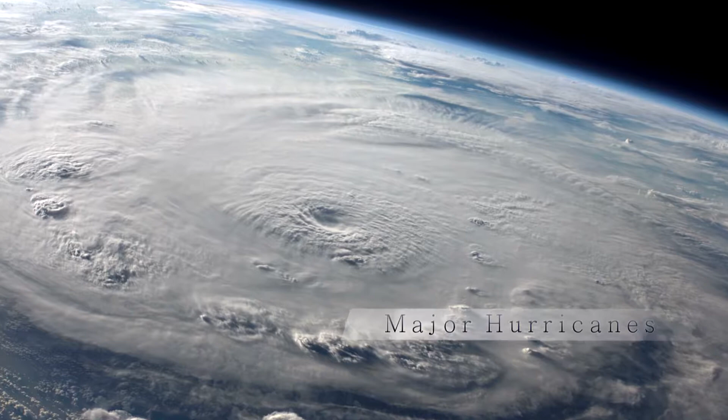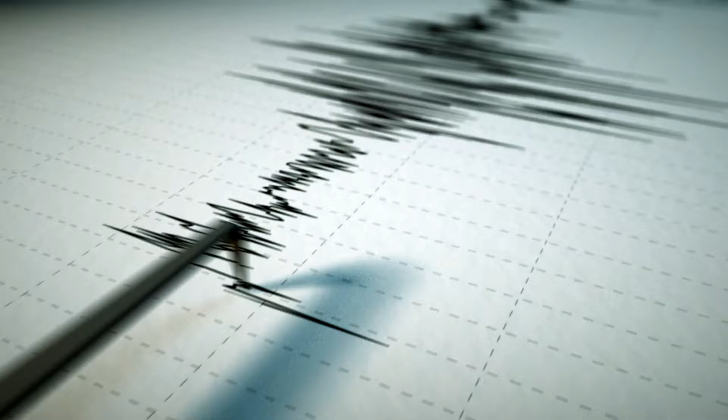Major hurricanes from climate change. Sudden rainstorms caused by global warming. Earthquakes that result in tsunamis. Damage from flooding caused by natural disasters is a real threat in our world today.

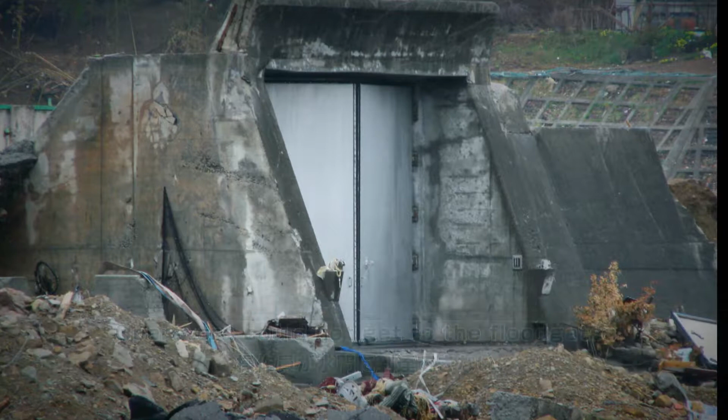The Great East Japan Earthquake of 2011, a magnitude 9 earthquake, triggered a tsunami that caused tremendous damage. The earthquake damaged roads, making it impossible for some floodgates to be closed. Many volunteer firefighters became victims of the disaster while closing the floodgates. We must not let future natural disasters result in such a tragedy.

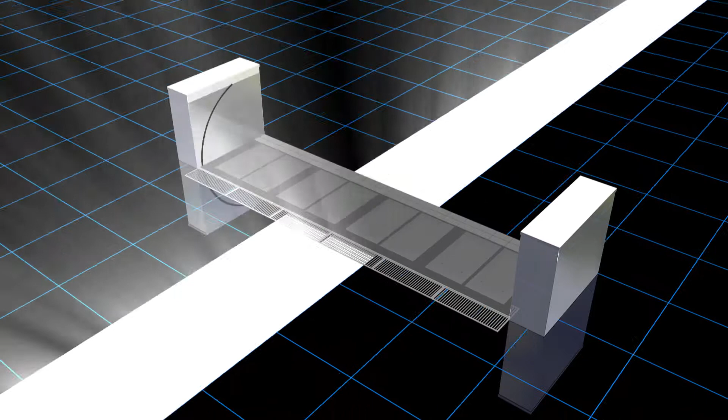Now, one possible solution is offered by the automated seawall system, NeoRise. The NeoRise stainless steel gates are reinforced with hard resin, adding strength while keeping the structure light. The flap gates float when flooding occurs, and counterweights automatically raise the gates to the water level.

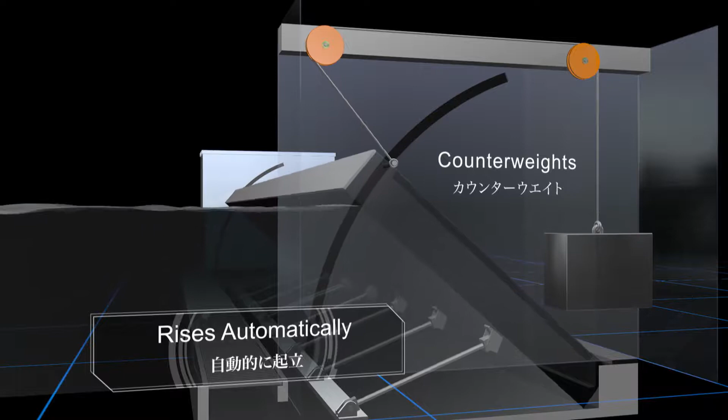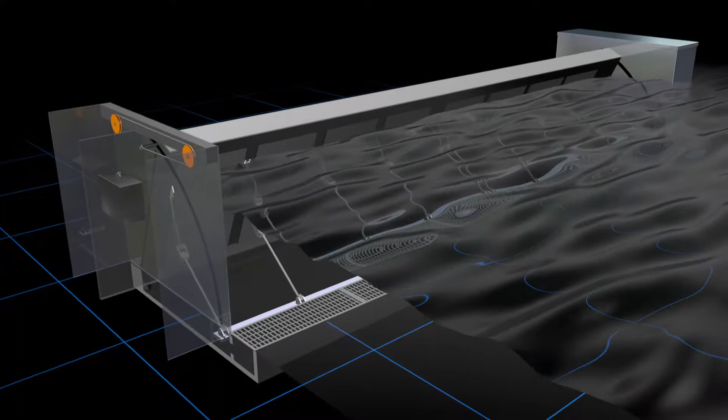The NeoRise system utilizes buoyancy and water pressure to close the gate. Therefore, electrical and communication systems are not needed, and no human interaction is required. No human intervention. No risk to operators' lives. No burden on human resources such as volunteer firefighters and civil engineers for surveillance.

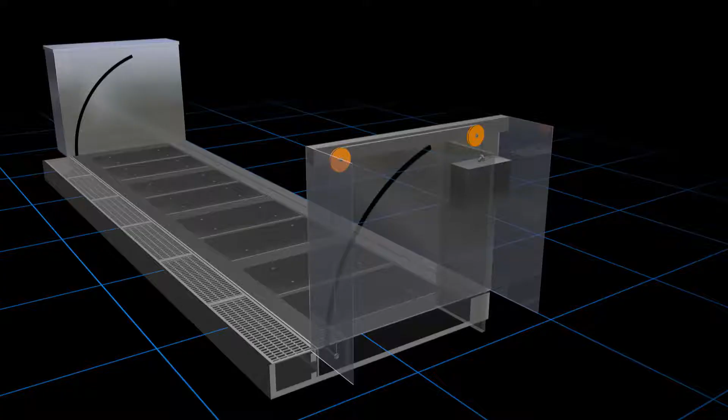When the NeoRise flapgate is in the resting position, the force of the counterweight raises the wall to absorb and dissipate the impact of the storm surge. There are no sudden movements that could cause injury.

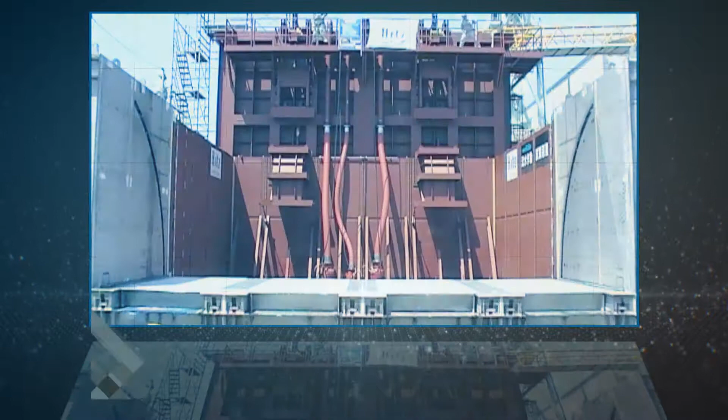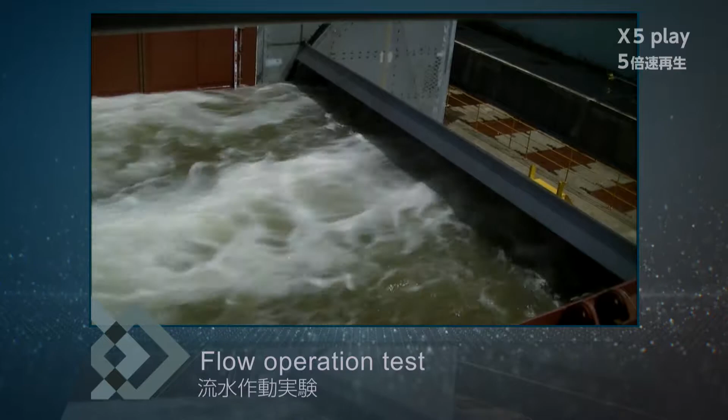Flow operation tests have been conducted at our own factories. Gates must adjust smoothly to floodwater levels and also must close quickly, but not so quickly as to be a danger. The flapgate opens and closes without endangering anyone nearby.

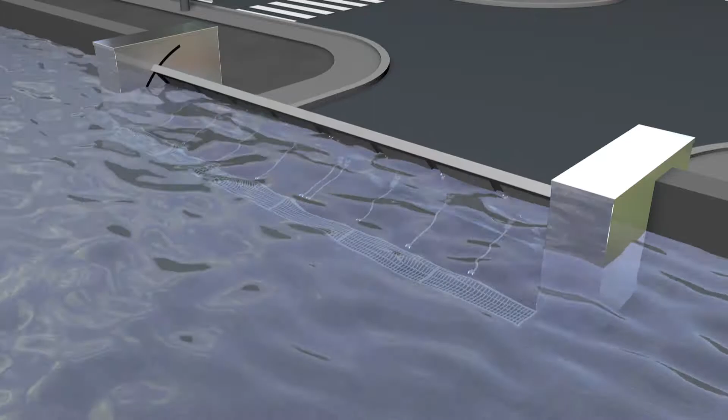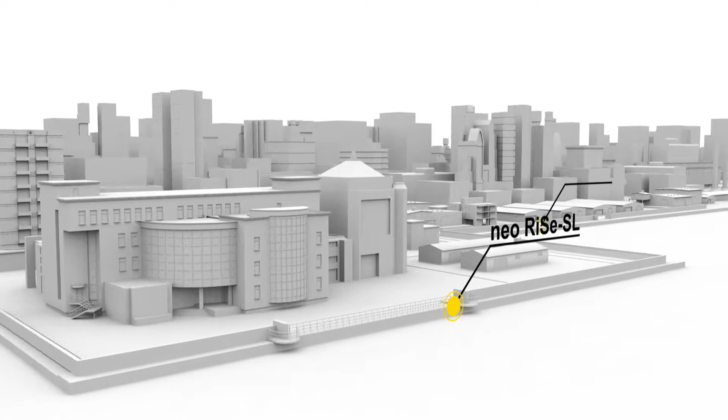There is no need to close the NeoRise flapgate before a natural disaster, as the buoyancy of the flapgate causes it to close, allowing easier evacuation. The NeoRise lineup offers solutions for not only tsunamis, but also storm surges, urban flooding, and almost any other kind of flooding.

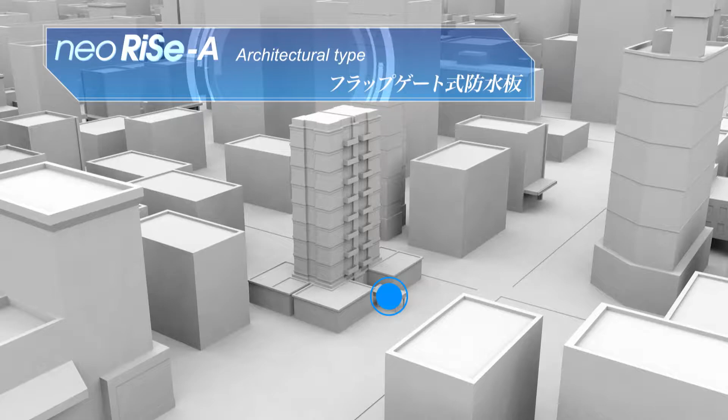NeoRise land-mounted flapgate retractable seawall, intended to be installed at a landlock or entrance to a factory. NeoRise A, architectural type, designed to be integrated into building exteriors. NeoRise L, light, simple type. This simplified seawall lineup can easily be installed in place of existing equipment.

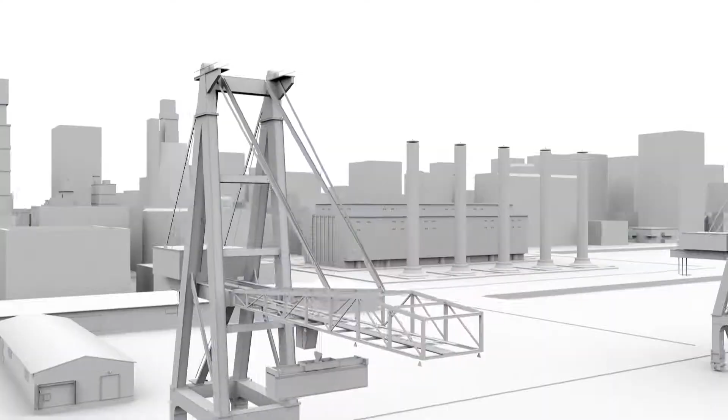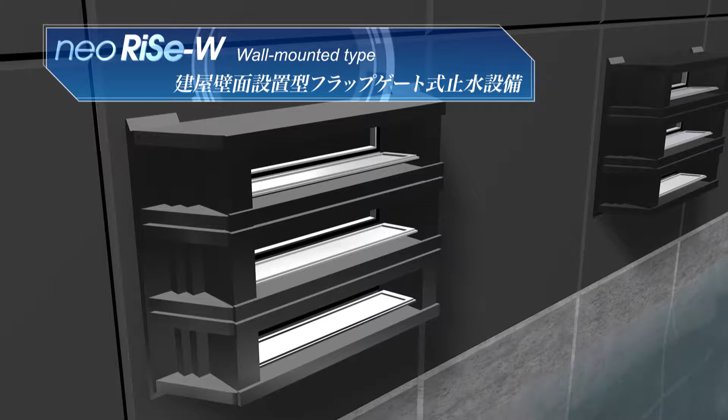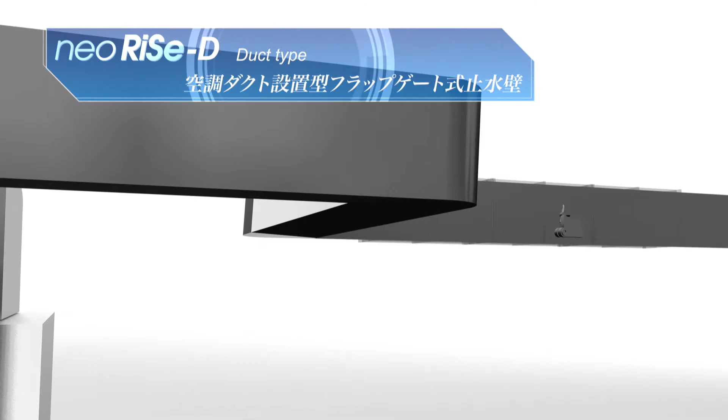NeoRise W, wall-mounted type, offers solutions for through-holes and air conditioning systems that cannot normally be closed during a flood. NeoRise D, duct type, designed to be used in air conditioning and ventilation ducts. NeoRise SL, super long span type. This retractable seawall can be extended to protect long spans such as runways or riverbanks.

In this world where there are constant threats of flooding, the NeoRise seawall system has already been used to protect ports, factories, and many other buildings. The system is more flexible than conventional units, costs less, is easier to manage, remains hidden in non-emergency situations, and is less dangerous to operate.

No energy. No operation. Rising seawall. NeoRise. It will contribute to sustainable disaster prevention and reduction to protect the lives of people around the world.